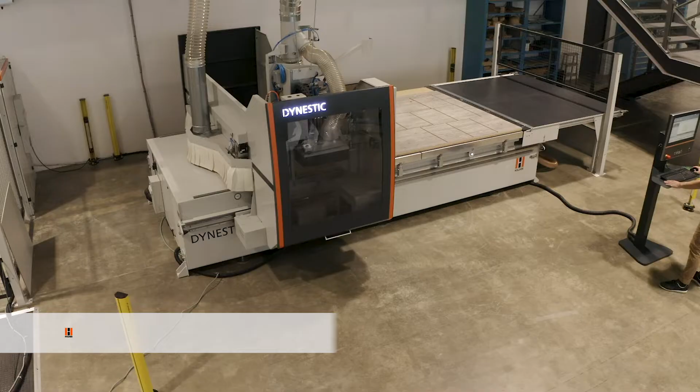Dynamic, flexible, and of the highest quality in every respect. The Dynestic series from Holzher is the machining center for complete panel machining in the nesting process. Thanks to the enormous versatility in its different equipment variants, the CNC series can be adapted to any desired operating mode and the most varied degrees of automation.

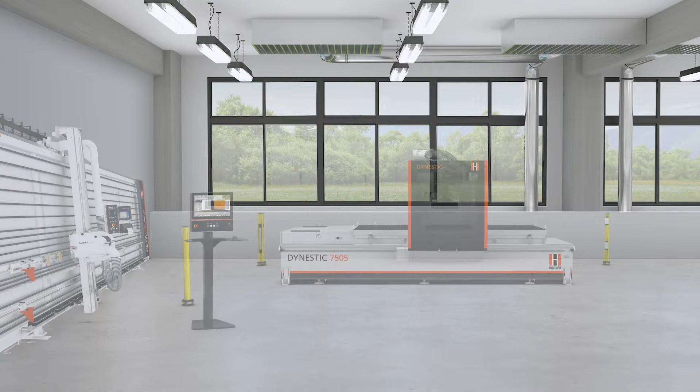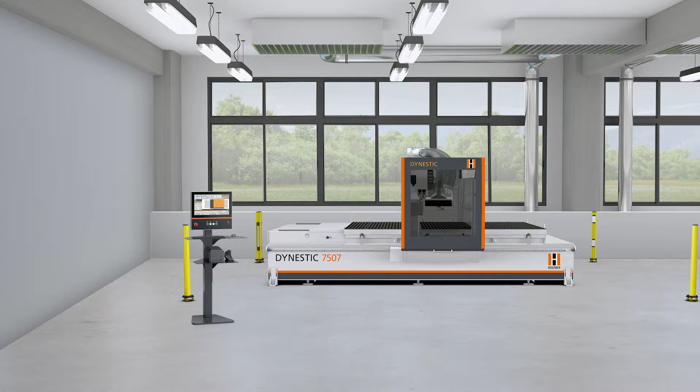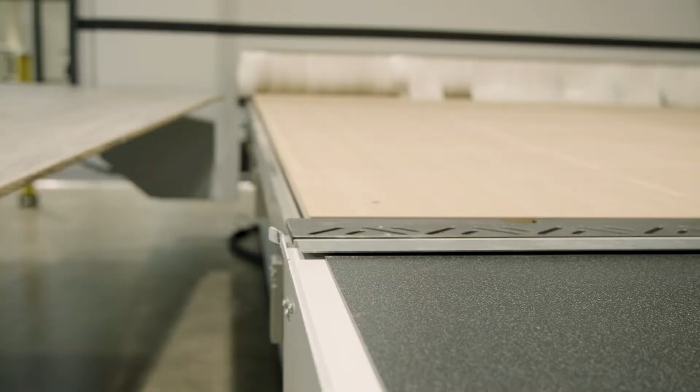The classic versions of the Dynestic 7505 and Dynestic 7507 offer the space-saving and versatile standalone solution for the entire spectrum of CNC machining. Thanks to its modern safety concept, the machining center can be placed anywhere in the room or in a corner to save space. This makes it just as easy to load the machine table using a sheet transport trolley or vacuum lifter as it is to remove the finished nest from all sides in the classic variant.

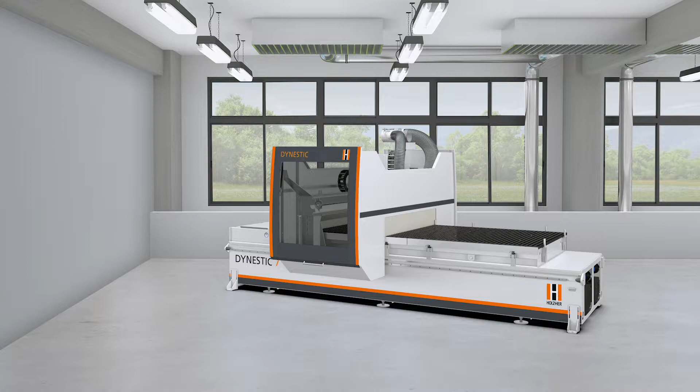The Dynestic series offers the right equipment and machine size for every panel format and the most diverse materials. The machine table of the Dynestic 7505 can process panels up to 1600 mm in depth and is available for panel lengths of 3100 mm, 3700 mm, as well as 6250 mm. For European panel sizes and special formats, the Dynestic 7507 with a machining depth of 2200 mm and machining lengths of 3100 mm, 3700 mm, as well as 4600 mm is exactly the right choice.

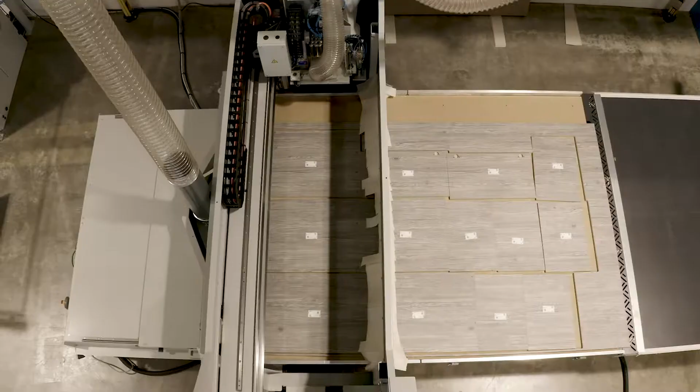In the push variant, a height-controlled pusher simultaneously serves to clean the nested workpieces and automatically transport them to the fixed pusher table. With the upgrade to the motorized conveyor belt, you can achieve even higher productivity. The machining table is thus immediately available again for the next plate, and the operator can remove the finished workpieces easily and quickly.

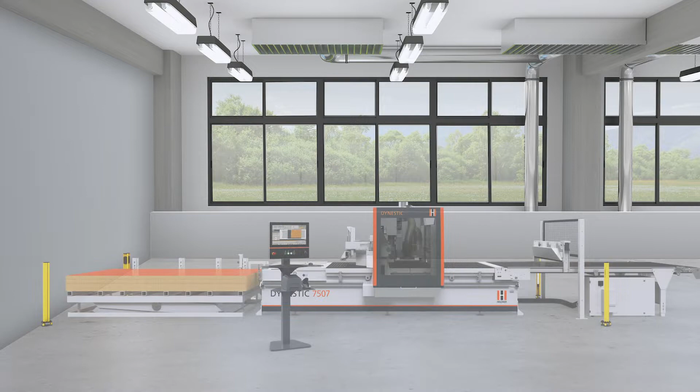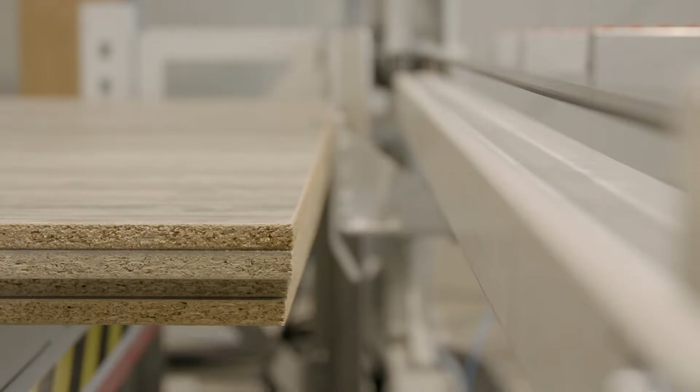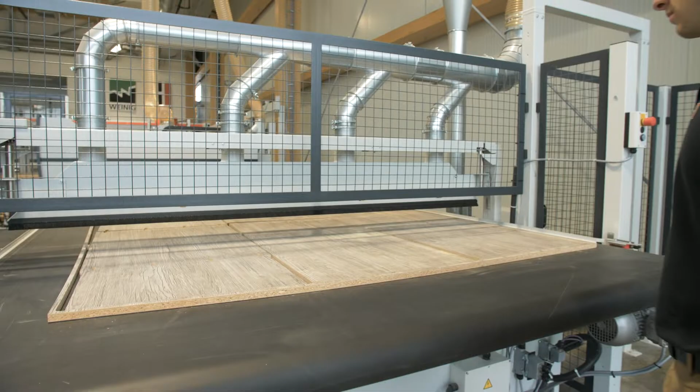The lift variants of the Dynestic are perfectly equipped for processing complete plate stacks with very high plate throughput. The lifting table positions itself hydraulically, and the front edge of the panel is measured for automatic dimensional correction when it is drawn onto the machine table. At the end of the machining program, the finished nest is pushed onto the conveyor belt and a new plate is picked up from the lifting table at the same time. This creates an efficient workflow with the highest possible productivity.

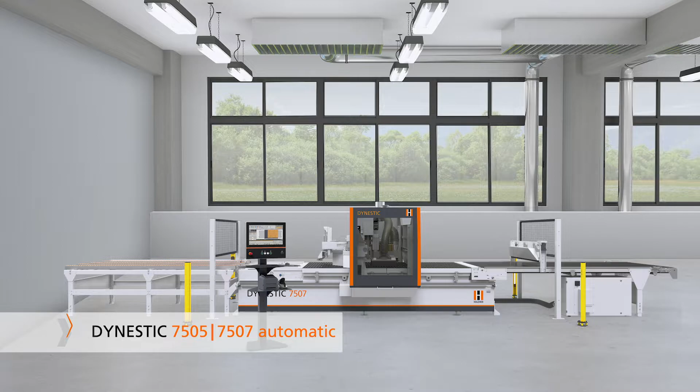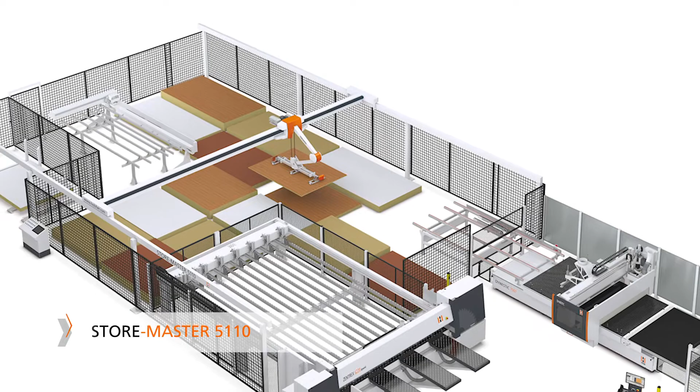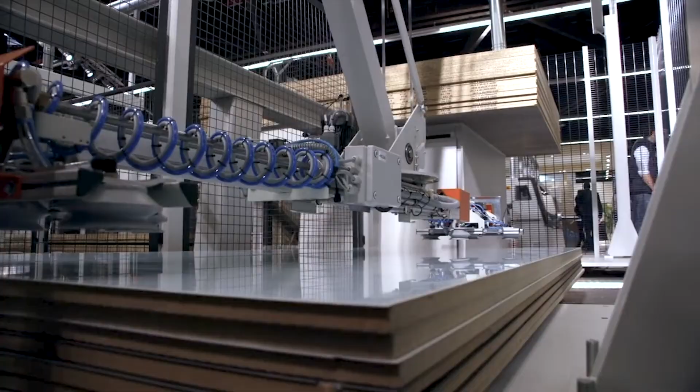In the automatic version, the Dynestic can be seamlessly integrated into an automatic plate storage system. The HOLZ-HER STORE-MASTER system can support series production just as efficiently as the colorful mix of materials for batch size 1. The machining center requests the required plates fully automatically from the plate storage system, which takes over the complete material management and the material and employee-friendly handling.

The extreme dynamics and high pulling power of the powerful 10.3 kilowatt spindle ensure optimum milling results and short machining cycles in carcass furniture construction.

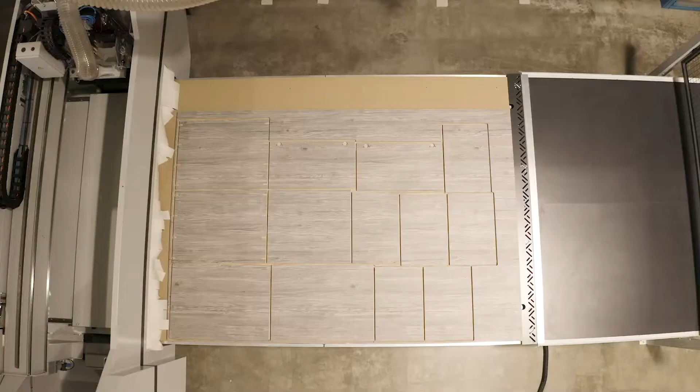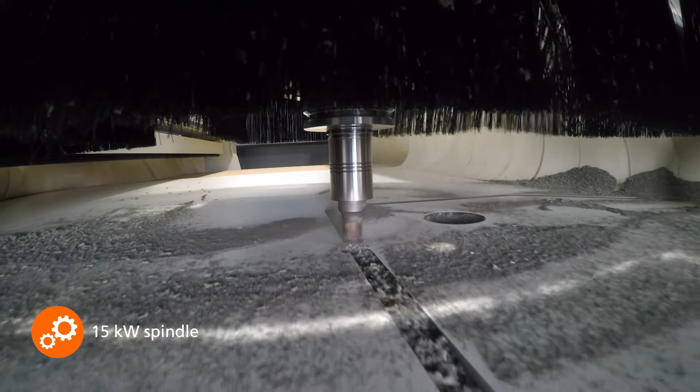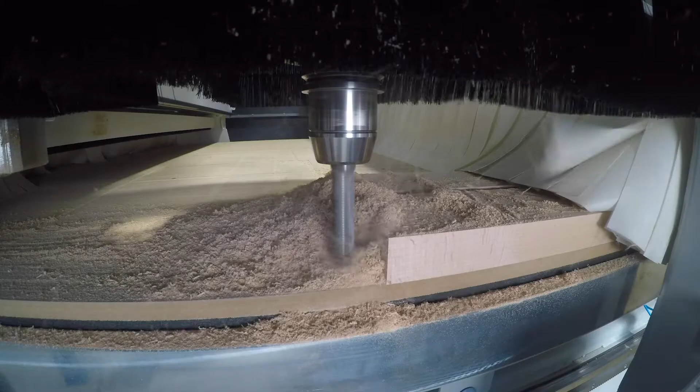For even more performance, the 15 kilowatt power spindle is responsible. With it, you can easily machine solid wood materials as well as composite materials and plastics with the highest quality. Get the ultimate in nesting performance with the liquid-cooled 16 kilowatt spindle that won't back down from any task, including multi-shift operation.

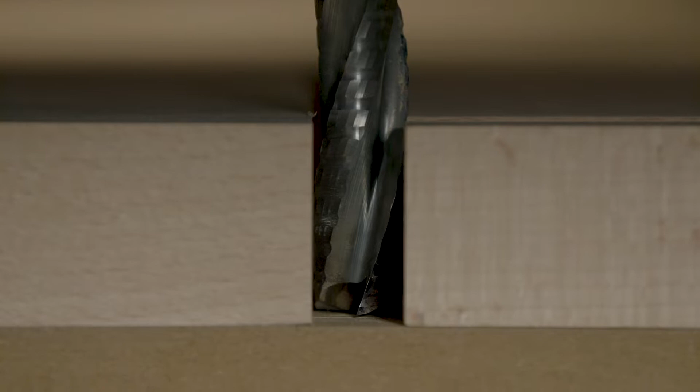With the optional and fully interpolating C-axis, absolutely flexible results are achieved on the machining center. And these can be seen from any angle.

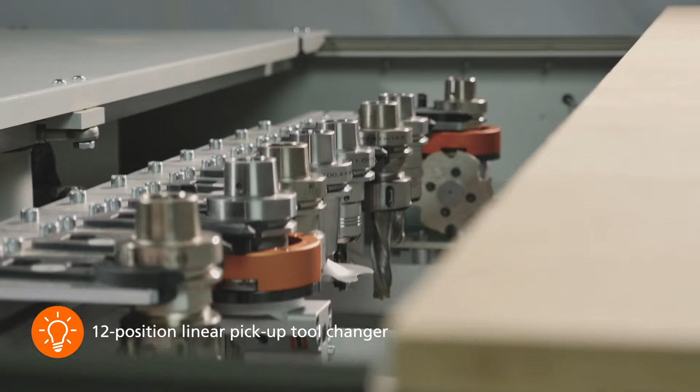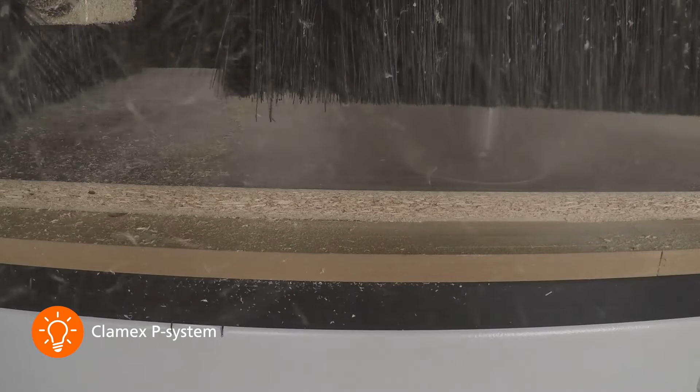Maximum flexibility is offered by the linear tool changer with up to 12 places for tools up to 160 mm diameter. For the special Clamex unit, the swiveling XY changer can also be ordered. The solution for inserting the Clamex pockets in the panel edges is unique. A specially designed tool mills a circular pocket and the pockets for the P-system to the left and right of it in a single operation.

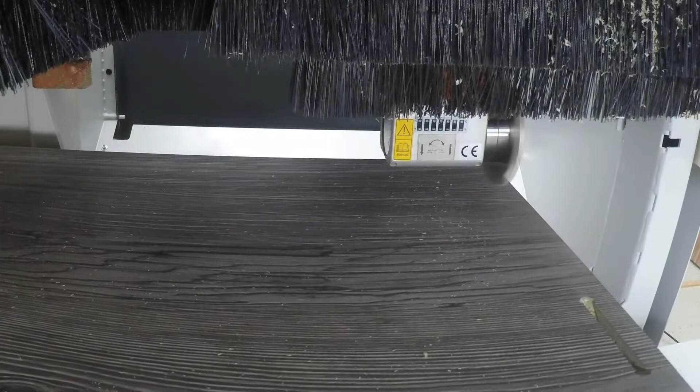The BetterNest freeform software nests the workpieces for optimum material utilization and shortest cycle times. The insertion of the Clamex milling cuts in the X and Y directions in the surface can be done either with the pin cutter or, for maximum tool life and optimum machining quality, milled with the side milling cutter.

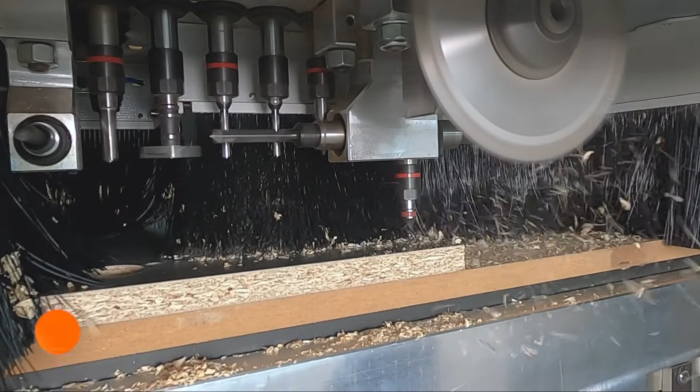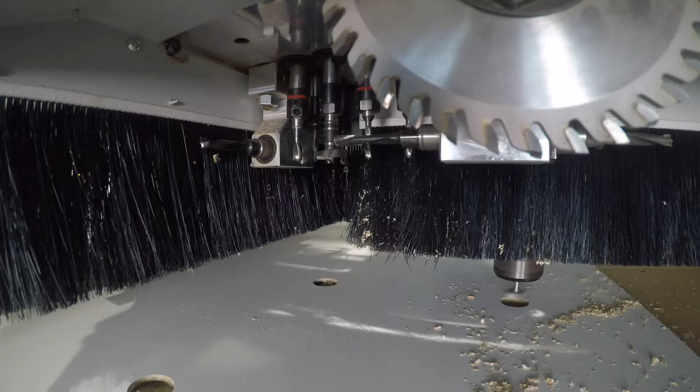With the versatile Cabineo furniture connector too, you have various options for inserting the cloud-shaped recess. Whether drilling or milling, the choice is yours. The fixed chip nesting fitting has proven itself as an alternative to the dowel. No matter which nesting fitting you use, everything is possible on the Dynestic.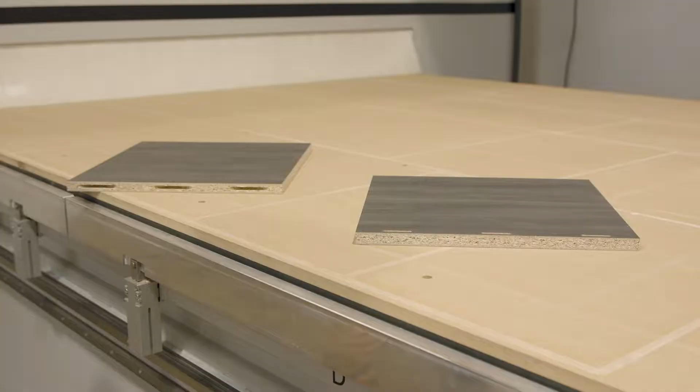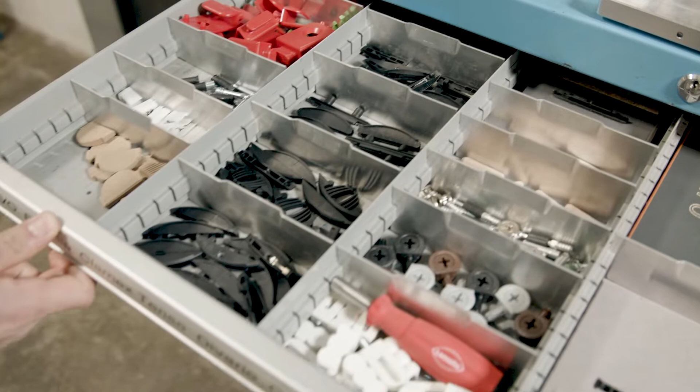The Dynestic is the all-rounder among CNC machining centers and thus perfectly suited for a colorful mix of materials and a wide variety of connector technology.

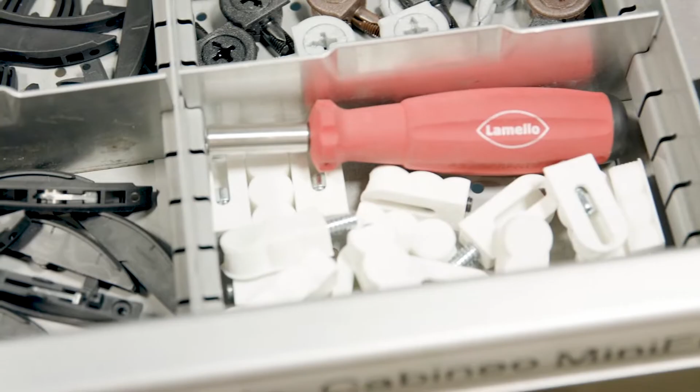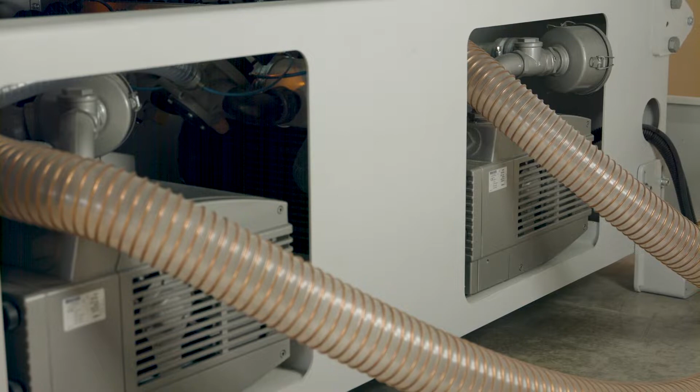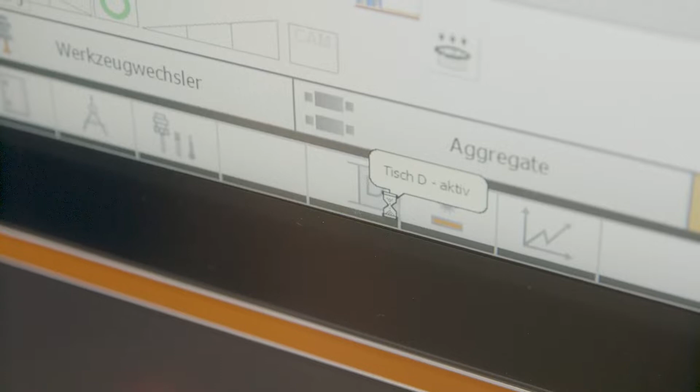The intelligent vacuum field control of the Dynestic independently switches the vacuum area required for the respective plate size to active and thus optimizes the applied vacuum power. Via the software-controlled EcoVac system, the vacuum pumps switch on in sequence and only when required, thus saving valuable energy. The vacuum required for the respective processing is monitored and sufficient power is provided for this purpose.

Valuable information for further processing and assembly of the workpieces is provided by the print module for labels. The labels can contain the commission, the part designation, the machining programs for the edges, barcodes for identification, and, of course, your company logo.

Holz-Her offers several solutions for generating labels from the BetterNest software. The Touch Label Light system adds the label software and the printer to the operating terminal of the Dynestic, allowing labels to be printed by touching the desired workpieces on the nest plan.

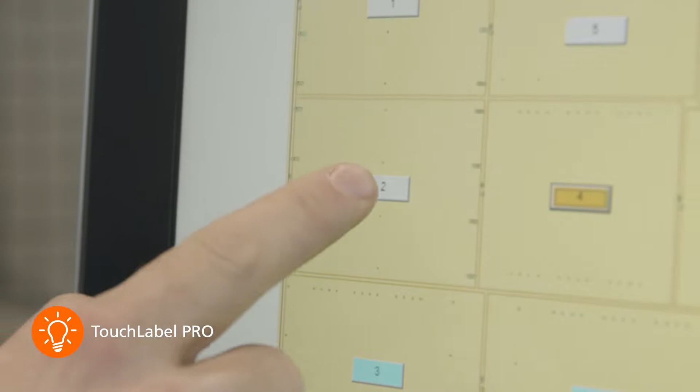For a higher degree of automation, the convenient TouchLabel PRO system is suitable, which is mounted at the end of the outfeed conveyor belt. Here too, the appropriate label for the respective part is generated and printed when the monitor is touched.

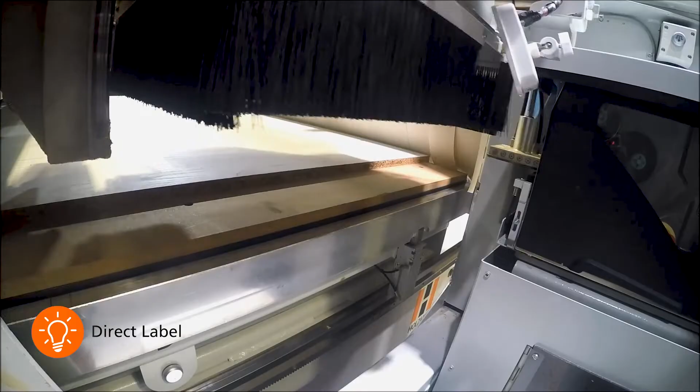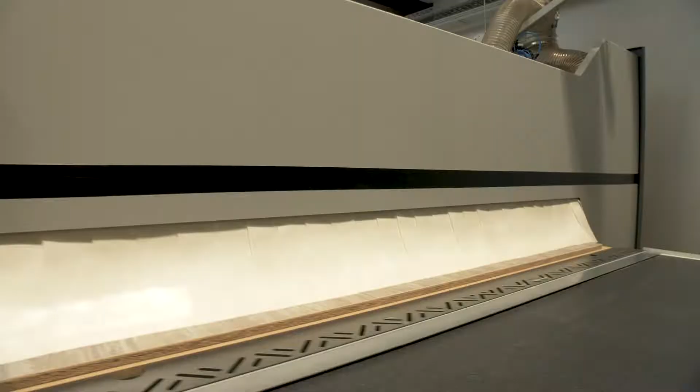The fully automatic direct label system integrated into the machine offers maximum convenience. Here the labels are automatically applied to the correct position on the plate before CNC machining. With the direct label system, process reliability is thus once again significantly increased.

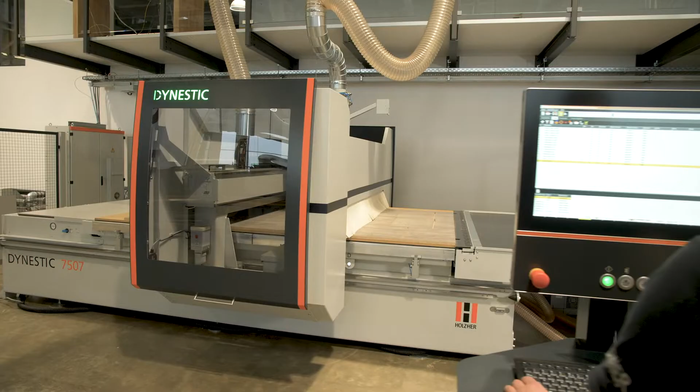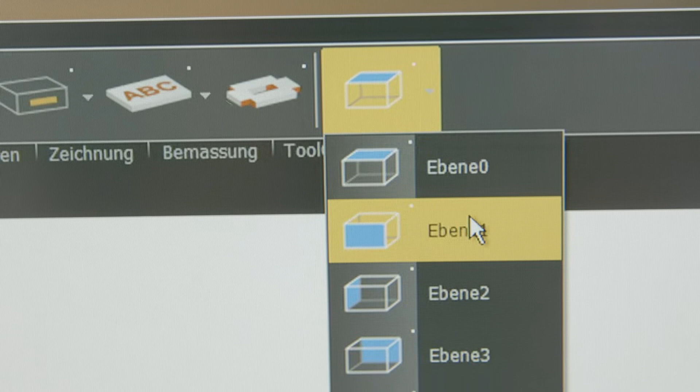With Dynestic, ease of use of the control elements is at the top of the list. The recognized leading and versatile Campus NC-Hops software package offers simple programming of even complex parts thanks to a wealth of existing macros and auxiliary functions such as easy snaps, free planes, auxiliary geometrics, and much more. This means that, in addition to furniture parts, complex components can be generated fully parametrically with just a few clicks. All programming levels are arranged in an extremely clear and user-friendly manner.

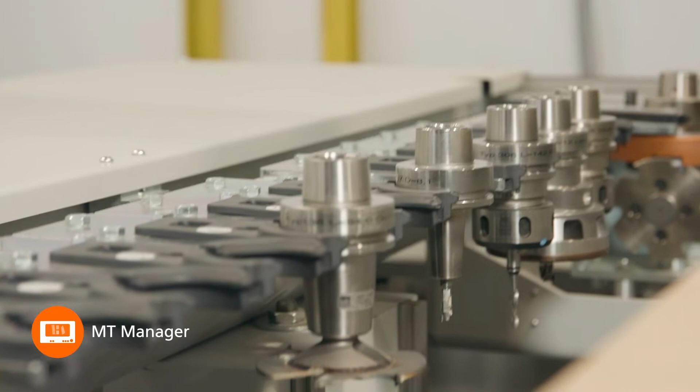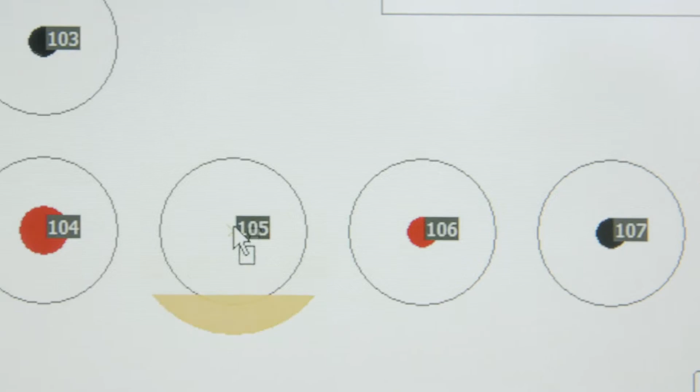In the intuitively operated Tool Management MT Manager, you equip your machine with the necessary tools, while the application area, important tool parameters, and profiles can always be kept in view. On the 21.5-inch multi-touch screen, you can already work dynamically and with fingertip feeling while programming.

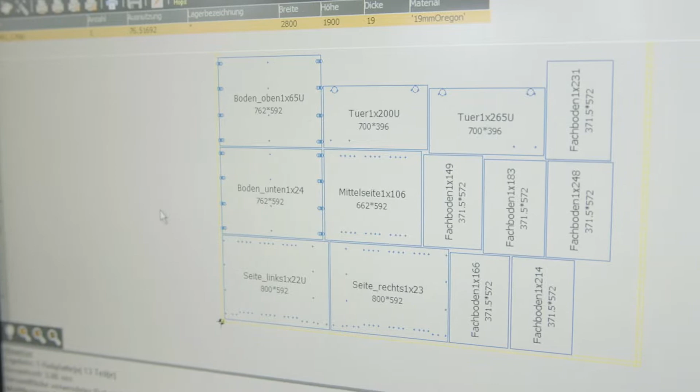The Holzher BetterNest nesting software is responsible for optimum and waste-optimized results. The rectangular nesting function fits furniture parts and other rectangular components into the selected raw panel with just one mouse click.

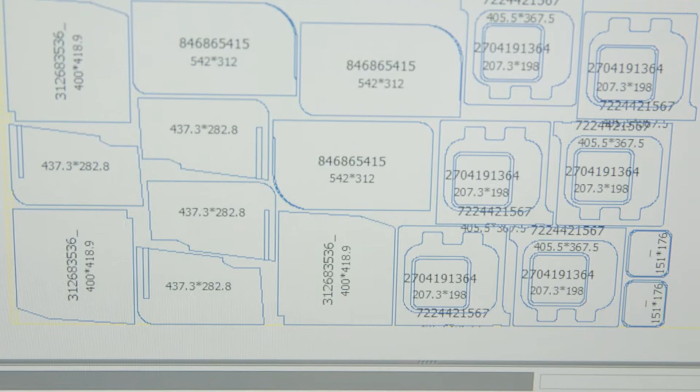If you like it more individual, or molded parts are more frequent, freeform nesting is exactly the right choice. Here, the components are perfectly nested into each other, taking into account the outer contour and the grain pattern.

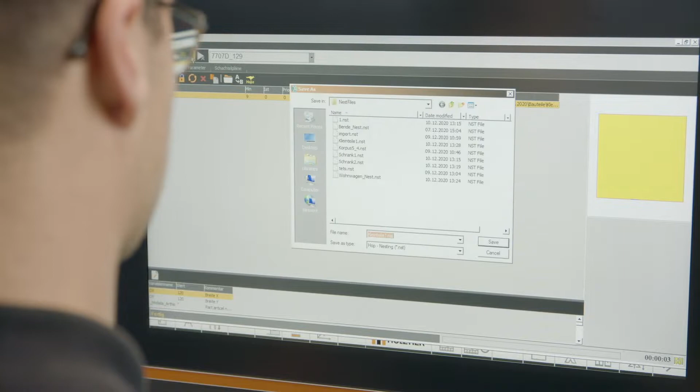To guarantee maximum process reliability, BetterNest has been equipped with additional intelligent features. Small parts can be milled in the nesting plan with the desired machining strategies: onion skinning, where the parts are milled in several steps, or with small bridges, the so-called bridging mode.

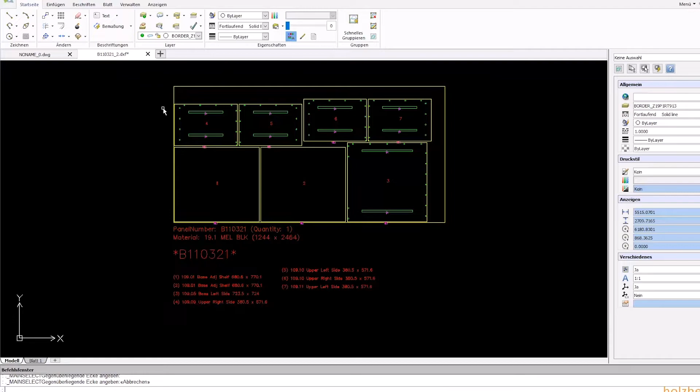Also standard, and of growing importance, is the professional DXF import of components and nest plans from CAD software. Drawn with suitable layers, the CAD drawing can even be placed directly on the work center, and thus virtually on the machine table, then processed without intermediate steps.

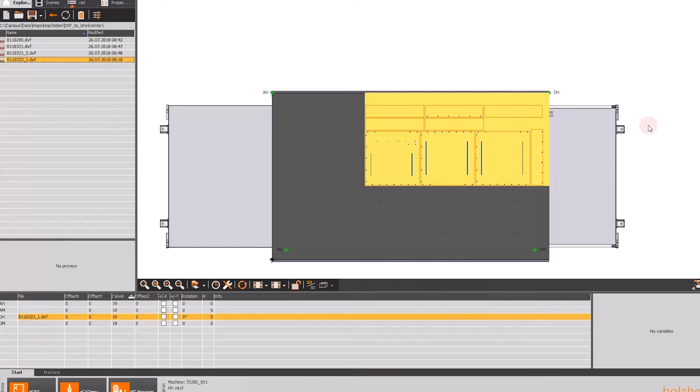Thanks to the open interface to post-processors, HOLZ-HER machining centers also offer enormous flexibility for data transfer from leading CAD/CAM programs.

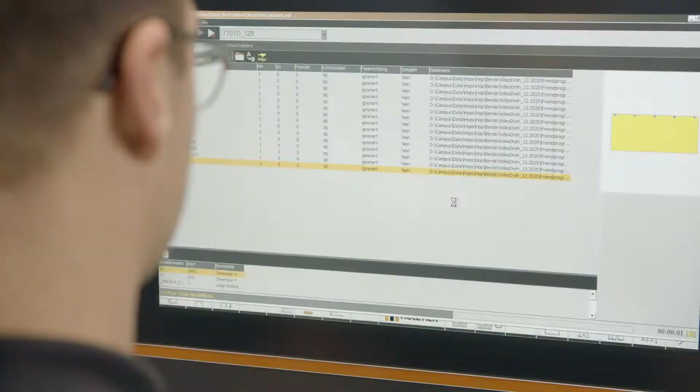Via the BetterNest Plus add-on module, complete data records can also be read in the defined CSV format and automatically nested in the BetterNest freeform software. This means that even the transfer of large orders with a large number of individual parts is no problem.

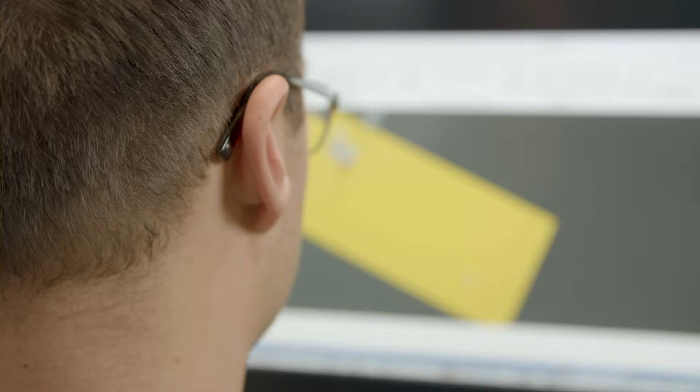The sequence simulation of the CNC program, supplied as standard, can optionally be extended to the 3D ablation simulation shown here.

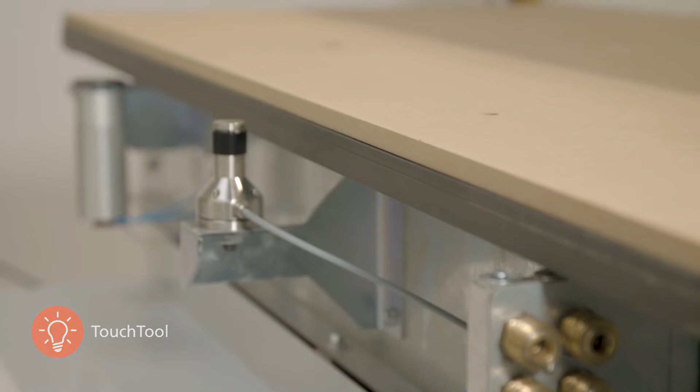With the optional touch tool length measurement, precise and fast length measurements of standard tools are fully automatic. The measured length is automatically corrected in the tool database.

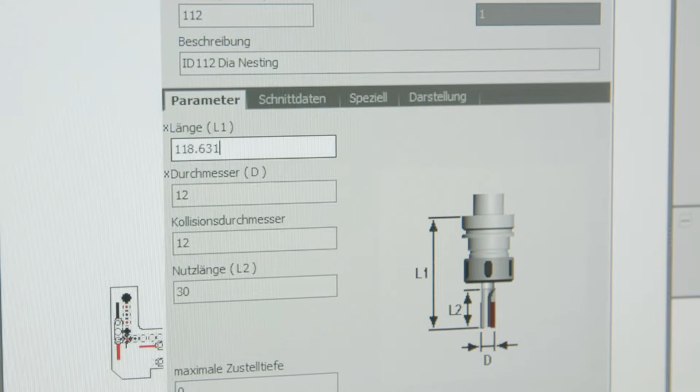Important sensor data such as spindle temperature, tool imbalance and double speed monitoring are provided by the chip control spindle sensor.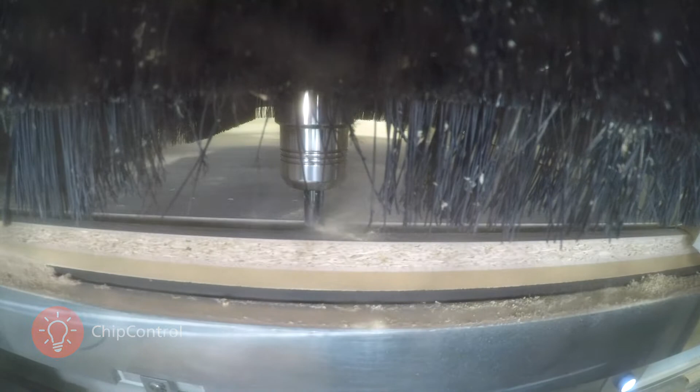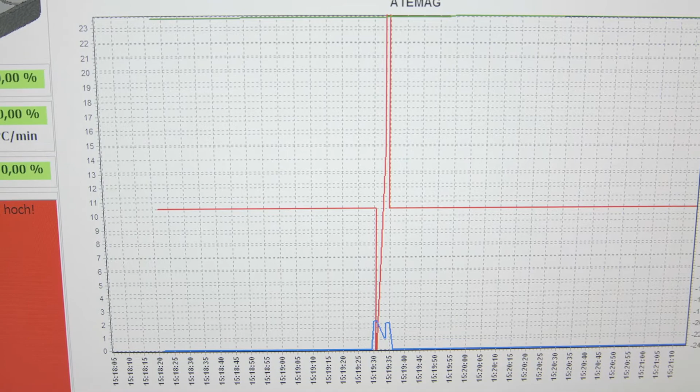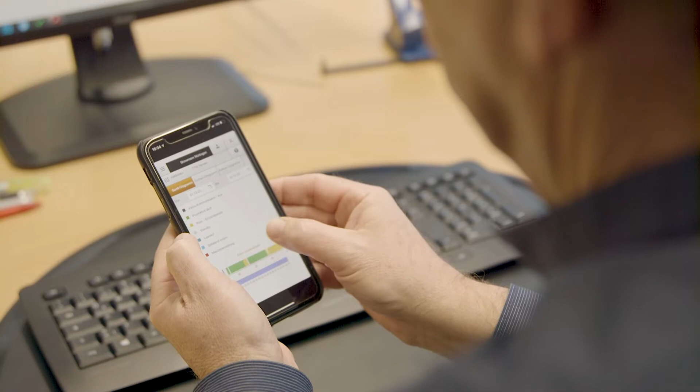Helpful hints and warnings are perfect, especially in combination with the VIA Cockpit digitization package, and the possibility to display these messages for prevention also on the VIA Condition module of mobile devices.

The integrated drilling unit is ideally set up for row drilling and back panel grooves in furniture and structural engineering. For even more flexibility, the XL drill head can also be selected.

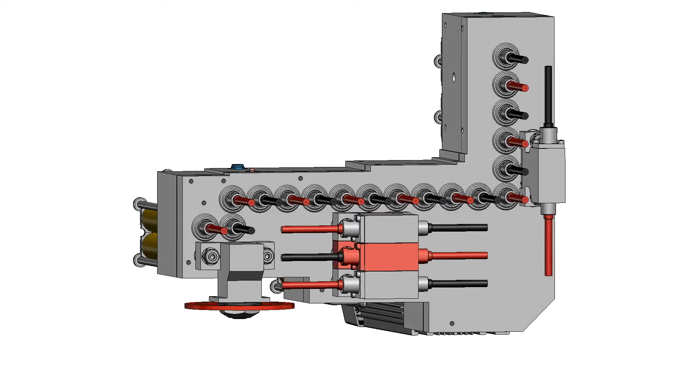The machine software automatically optimizes the tool sequence. The speed and feed rate are also trimmed via the control system to achieve long tool life and high performance at the same time.

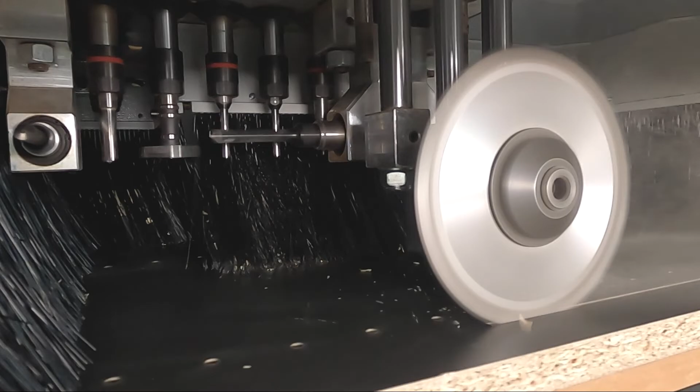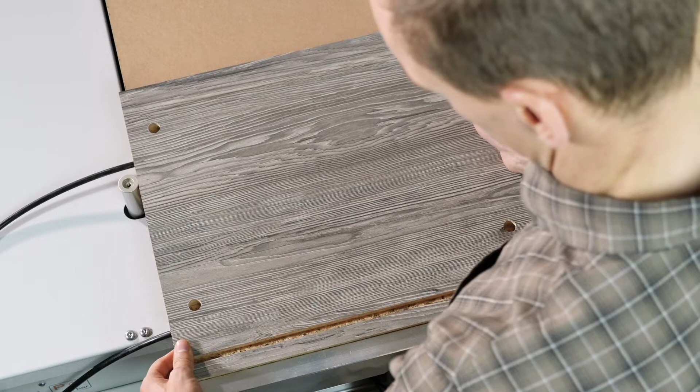Of course, traditional dowel connections are also quickly inserted. Horizontal drilling for dowels and mini-fix can be carried out in a second machining of the workpieces on specifically developed vacuum suction cups.

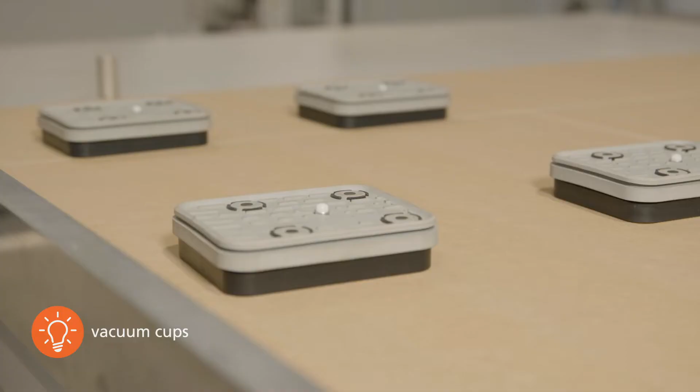The vacuum cups can be operated with or without hoses, depending on the vacuum performance requirements. Profile milling, groove joints and other milling work are thus also no problem. This is particularly convenient in combination with a front stop row.

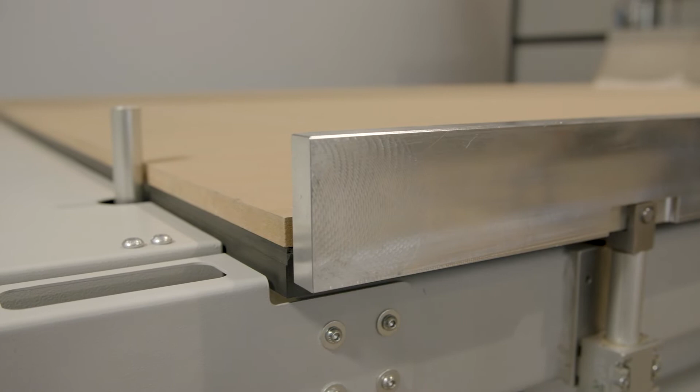You need a quick cut through a workpiece? With the Direct Cut software's single cut function, you save yourself a trip to the sizing saw. The laser shows you the way.

Was a workpiece damaged during assembly? Is a base missing on the construction site? Or do you still need a few additional shelves? With the optional direct cut module with line laser display, a few mouse clicks are all it takes to turn your leftover pieces into valuable workpieces.

The line lasers show you the exact course of the cutting lines at the touch of a button, thus also allowing you to avoid wood defects or damage in the finished components.

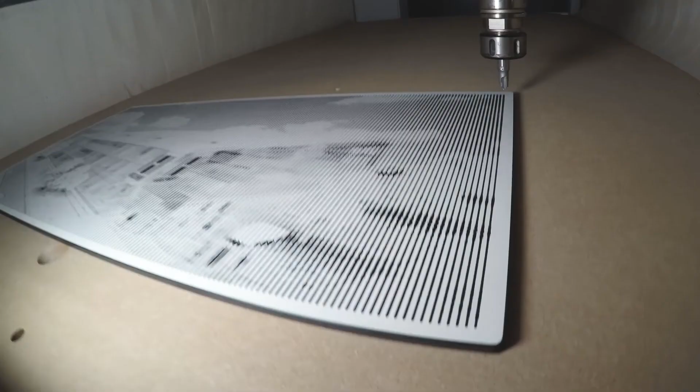Another interesting application is light reflective engraving with the Pick2Plate software, available as an accessory. Digital images are simply read in and the colors are automatically converted into milling depths. Fascinating images in 3D effect are created for versatile use from store fitting to private objects.

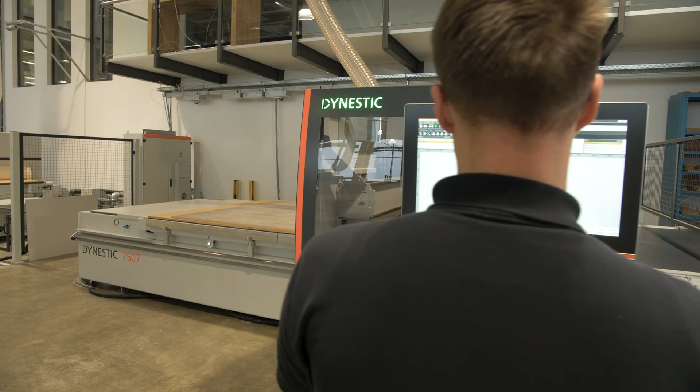The Dynestic series from Holz-Her is the ideal all-rounder for your workshop. The operator is relieved by smart functions and permanently informed about the operating status of the machine via the LED machine logo.

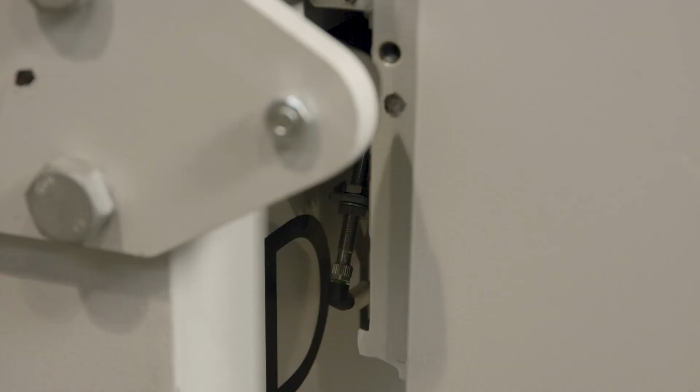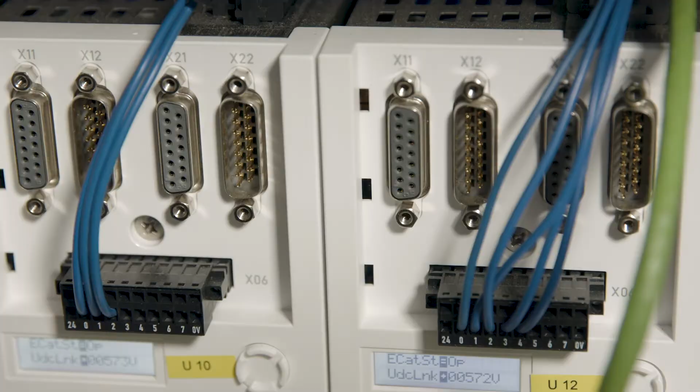A massive gantry design combined with high-quality machine components such as precise synchro drives, hardened linear guides and steel belt deflection, and the Eco air conditioning unit for the control cabinet installed as standard, make the Dynestic a reliable partner for your production.